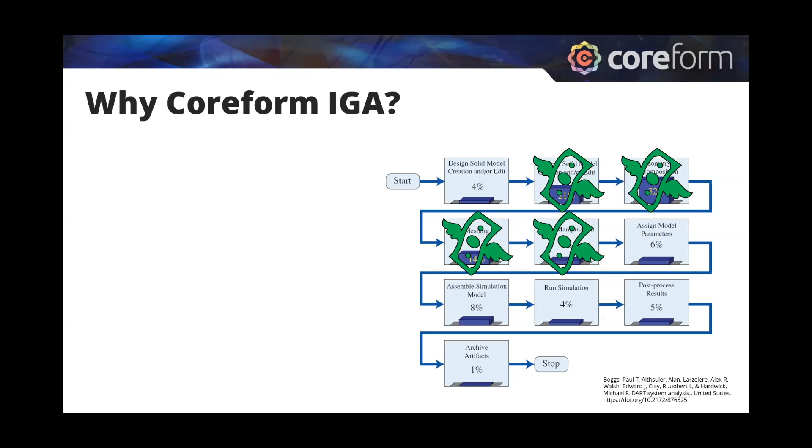Those are all things that weren't value added, and they're extremely labor intensive compared to the compute time on a computer, where the computer works 24/7—except for me, maybe it's got some downtime, but 99.9% uptime. The computer doesn't complain. And so it's all this labor that is actually causing a lot of lag in time and in money, in cost and money.

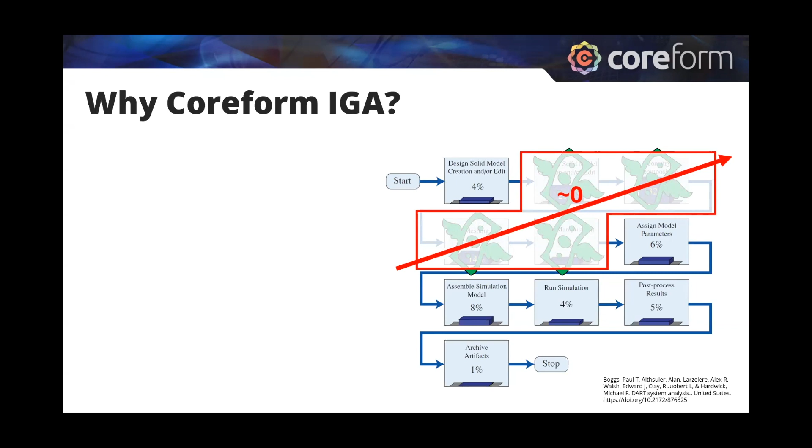The intent, or the desire, is to drive these non-value-added parts as close to zero as possible, and to do that through reducing the meshing time. By doing that, we can radically accelerate product design as well as analysis. So when there's failure analysis, we need to do a simulation to understand why things failed, and we can accelerate that process as well. We can do this through our proprietary advanced spline basis functions, which increase simulation accuracy and provide us the flexibility we need to decrease the meshing time.

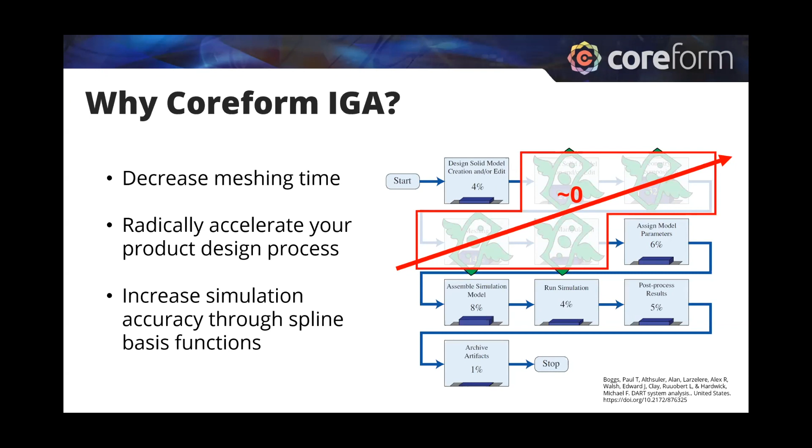Now, if we look at the landscape of mesh technologies and how they relate to simulation performance, we're going to look at the performance of simulation from total time to solution, from slow to fast, but also the accuracy from low to high. Traditional hex-based FEA is slow relative in terms of total time to solution because it's very labor intensive, but provides high accuracy results, which sometimes you have to have for critical, mission critical parts.

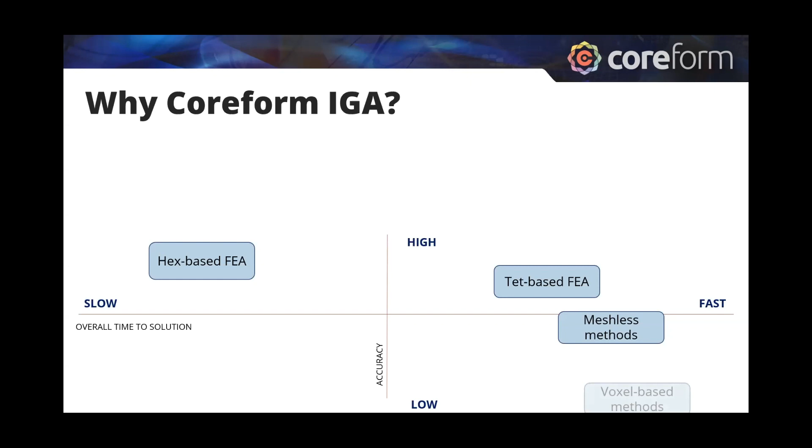and failure analyses. Tet-based FEA provides a much faster overall time to solution than traditional hex-based FEA, but you sacrifice some accuracy per degree of freedom. And there are additional techniques coming out, like traditional meshless methods and voxel-based methods, which provide even faster total times to solution, but sacrifice accuracy even more.

With our advanced spline technologies at Coreform, we've actually now increased the accuracy level that can be attained by modifying or augmenting traditional hex-based FEA with body-fitted U-splines, high-order smooth U-splines. And because of their high order and their smoothness, it reduces some of the constraints on the quality of a hex mesh that we might prescribe, as well as less time iterating for the analyst trying to get the right knobs turned to get accurate solutions. But it's also still not as fast as we could be.

And so what we're now looking at with Coreform IGA is the other regime where we can take immersed U-splines, which now provide still high accuracy because they're high order smooth basis functions, but are now much faster than traditional hex-based FEA. And it's this entire regime that Coreform IGA is developing a software solution and different technology solutions for.

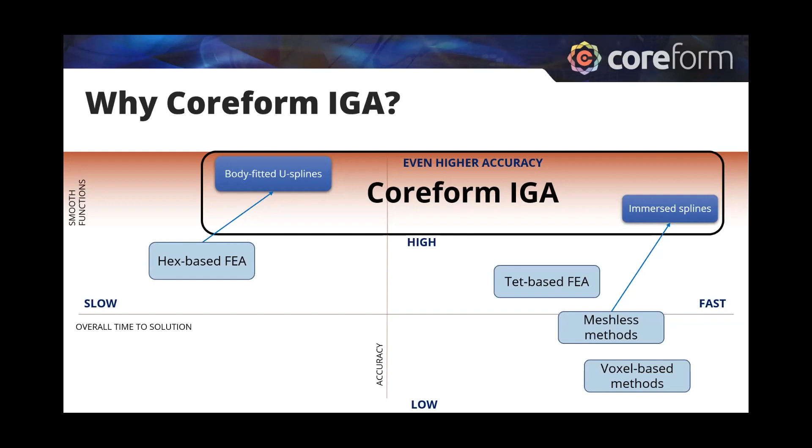Coreform IGA provides greater accuracy per degree of freedom, as I mentioned, but it's also isogeometric analysis. It has a tight CAD connection. Because of the local adaptivity properties of our underlying U-spline bases, you have more efficient computes. And then the flexibility offered by our proprietary technique allows the analyst to calibrate the speed and accuracy they need to solve the problem for their customer.

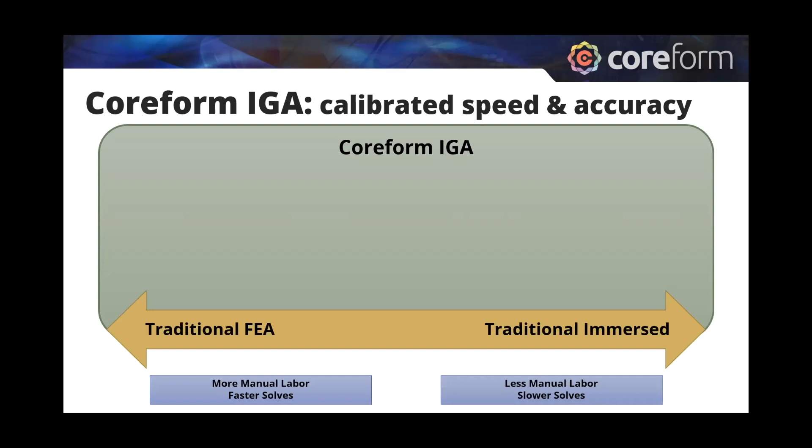Let's talk about how we allow the analyst to calibrate their speed and accuracy. So as I mentioned, we provide now a spectrum from traditional finite element approaches where, if the analyst desired or still needed to do some defeaturing—maybe there are some embossings that just don't make sense to have featured—you might do some defeaturing, but traditional FEA is attainable with our U-spline technology.

But there might have been features in the underlying CAD that made it impossible, or at least impractical, to build a body-fitted hex mesh for. By using a mostly body-fitted mesh, but reducing the requirement of body-fitting in some regions, we can restrict that requirement, which allows us now to build a high-quality hex-based mesh with high accuracy per degree of freedom.

And if you don't need that level of accuracy, but still need some general accuracy, you can defeature quite a bit more. Now our computational domain, shown here in purple, captures the outer radius of this piston and the symmetry faces. But other than that, we're really just going to use our adaptive U-spline technology to drive in accuracy where needed. So we can still get to any level of accuracy the user needs, but it will cost a little bit more in computation time because we'll need to drive more local adaptivity.

And you can go all the way out to almost no manual labor whatsoever—a fully immersing bounding box—relying completely on the local adaptivity of our U-spline technology.

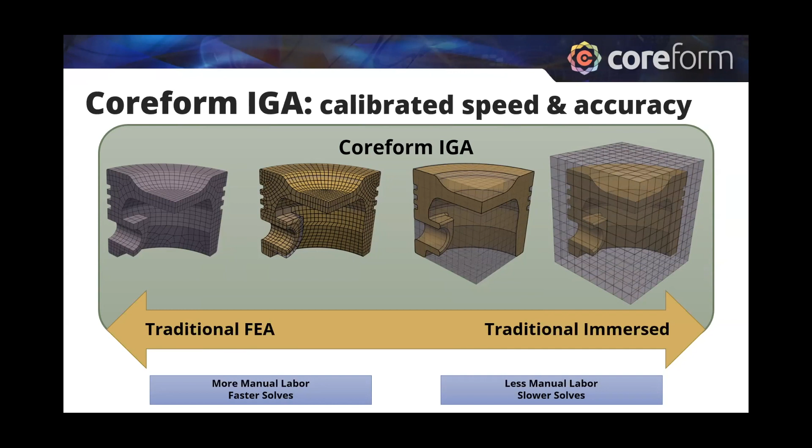Now, I want to show you this in action on an example problem.

Actually, before we do that, let me just focus in on that second from the left picture here. Here's this geometry—if you wanted to do a traditional hex-based mesh on this, there are these knuckle fillets, or shoulder fillets, which make this problem almost impossible to build a hex mesh for. It's possibly impossible for an analyst, in a reasonable amount of time, to build a usable hex mesh on this.

But you can see how we've now restricted this requirement, or lowered or removed it, with this purple computational domain, which immerses these features but still follows the general shape and structure of that volume. Now we can use our U-spline technology to locally adapt and refine where needed to accurately resolve the stresses there. So as an analyst, I've calibrated that I need to get a solution out to the customer quickly, but I still need a fair amount of accuracy. And this has allowed the user to drive that in.

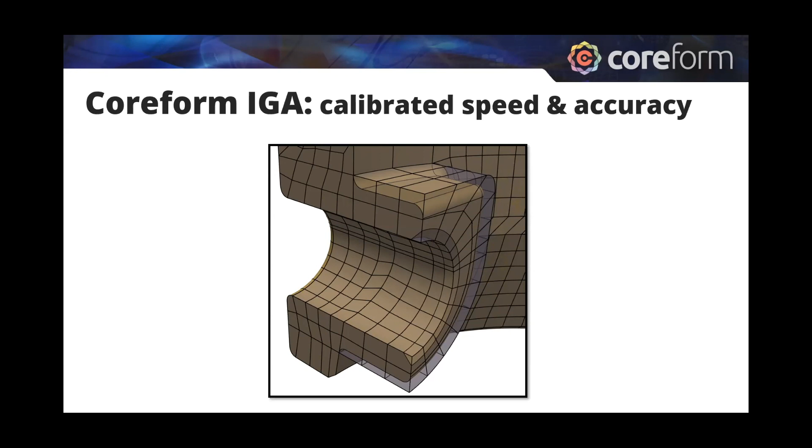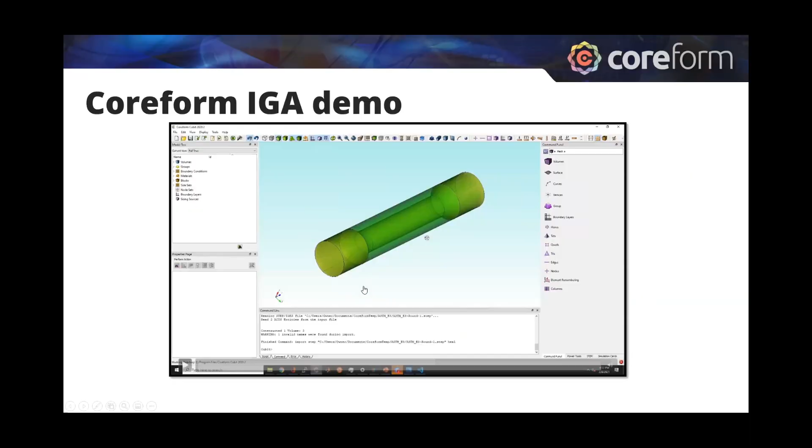Now I want to show this in action. So I'm going to show this example of an ASTM E8 tensile bar, and we can load this into Cubit as a geometry.

Cubit is a traditional finite element mesh preprocessor that supports CAD operations and meshing. We can represent this tensile bar as a cylinder that is only body fitted on the grip lengths, and then immerses the fillets, reduced length, and the gauge length.

Using Cubit, we can design our hex mesh as we need to on that cylinder for quality, and we can build a U-spline native into Cubit. That's never been done before, having Cubit natively now supporting spline technologies.

We can then create an input file and submit the simulation to our Coreform IGA solver, and then view the results back out in ParaView.

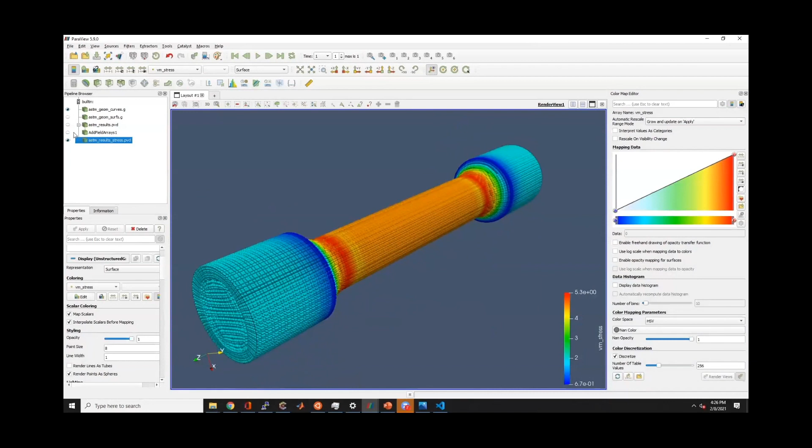On this slide, we're seeing the U-spline elements that contain at least one quadrature point within the volume. Now we can see we're looking at quadrature points of the stress results and also displacement results. This is brand new capability that we've added in the last few months.

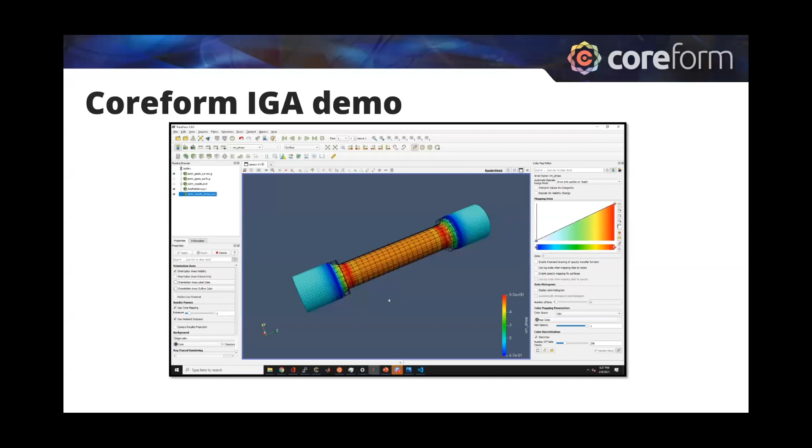And this is progressing at a quick pace. We'll talk about that later, that Coreform is releasing software now quarterly, and actually moving to an even faster release pace as we're developing capabilities.

Let's take a closer look now at that. So again, just that we have this tensile bar, if I wanted to build a quality hex mesh on this, I might need to do at least 2 partitions, maybe for my gauge length. I might also need to add another one around the other side of the fillet.

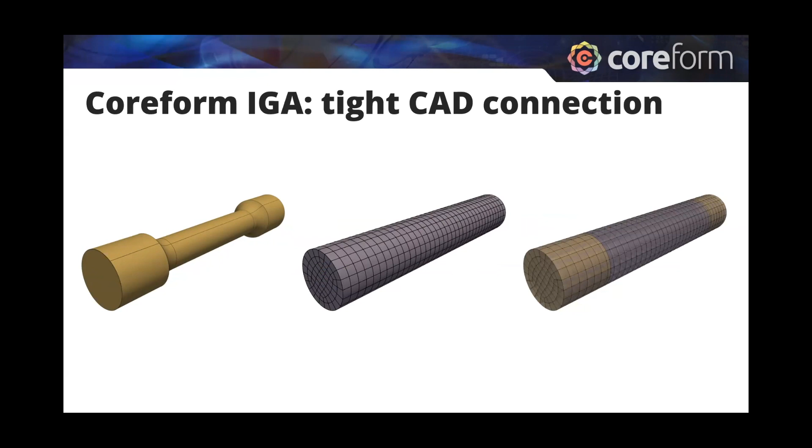But instead, we can just completely approximate this entire tensile bar as a quadratic U-spline cylinder that immerses it. So it's a tight CAD connection, but we also aren't sacrificing accuracy.

Comparing accuracy per degree of freedom, we can see that with 15 times fewer nodes and 30 times fewer degrees of freedom, we can get stress results that are within 0.1% of leading traditional FEA solvers. And that's just astounding.

Next, actually here, I'd like to pause for a bit and see if there are any questions, because this is maybe a new way of thinking about simulation technology. So I'm sure that there are some questions. So Matt, do we have any?

Yeah, so there are a few questions. One is about the solve time for how long this is taking in Coreform IGA, and if that's optimized yet. Sure.

Okay, sure. So one of the things I'll say, and we'll talk about this later, is that we use the PETSc open source solver library. PETSc is fully parallel, provides direct solvers, iterative solvers, Krylov solvers. We have the full power that's in there. If you look at just from degrees of freedom, because we have smaller systems of equations, those should solve faster. We have smaller systems to solve.

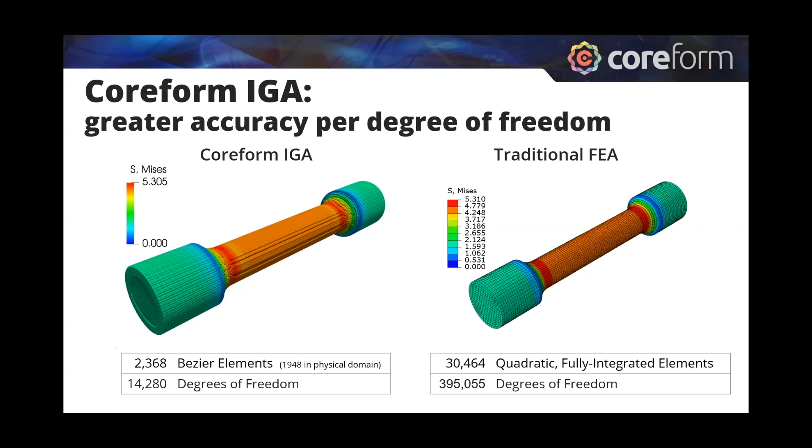Good, great. And so as I alluded to, we've done several projects, actually many projects with our early adopters. I'd like to go through at least a couple of those right now. So the first of these was provided to us from our partner, our collaborator, Kansas City National Security Campus from the Department of Energy. They have an application with flat flex cable delamination.

Just to orient you, flat flex cables connect printed circuit boards together. Oftentimes you might have a bunch of electronics you need to be able to perform a task, but you're constrained by space. And so you split your board into two boards, and then you use a flat flex cable to connect them. As you can see here, this cable is now bent at a certain radius.

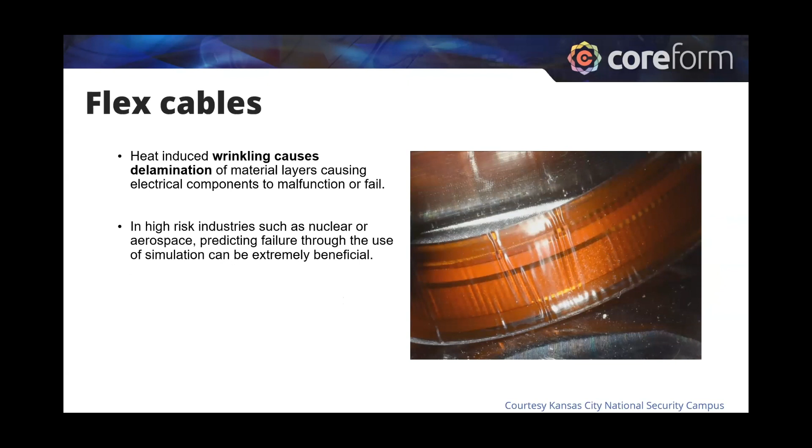The question Kansas City had was that they were noticing, as they were bending cables to certain radii, that during environmental testing these cables would start to wrinkle and then delaminate, which could potentially lead to failure of these cables. So Kansas City had developed simulation technologies or simulation workflows to analyze these with traditional FEM style codes.

On the right here, we see a mesh from a traditional FEM solver using many of the rules of thumb that many of you may be familiar with, like making sure you have a minimum number of elements through a thickness. In this case, the top is going to be in compression, that's where the wrinkling's happening, so there's a finer density of elements at the top.

The problem that Kansas City developed with our high order U-splines is shown on the left. A couple things to point out: because of the higher order, we can exactly capture this geometry with one element. We can also terminate our elements with T-junctions that are fully supported in the basis, so they're not hanging, there's no need to do a tied constraint between them. They're fully supported by the U-spline basis.

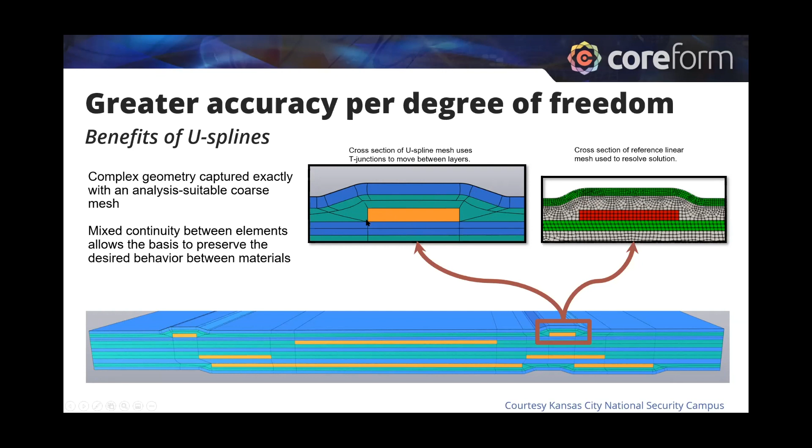We're also able to implement mixed continuity, so to have traditional C0 continuity at material interfaces. On the right is an animation showing this nonlinear analysis running in Coreform IGA, colored here by stresses. As we notice at the very end of it, we start to see wrinkling.

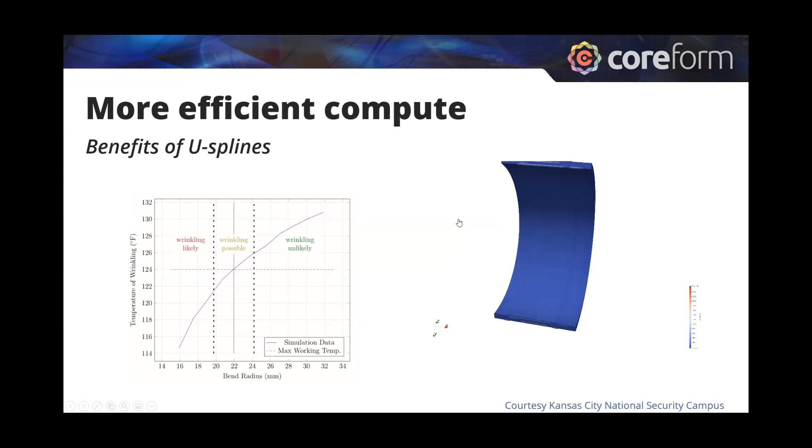We were able to give this capability back to Kansas City for them to be able to use to predict wrinkling, and compare it again back to their traditional solutions, where they were using upwards of 10 million elements to get solutions. We were able to solve this with under 11,000 elements - 1,000 times fewer total elements.

As Dr. Scott had alluded to previously, by drastically reducing the number of elements we have, even if each element is a little bit more expensive than traditional FEA, the almost exponential increase in accuracy per degree of freedom or per element is what allows us to be more performant.

Additionally, they were unable to get stable solutions using an implicit time stepping method, so they had to resort to a mass-scaled explicit statics study. We were able to solve this with default implicit dynamics solver settings. We didn't bother to use anything like automatic time scaling, we just used a set 250 time steps, but even that is 20,000 times fewer total time steps.

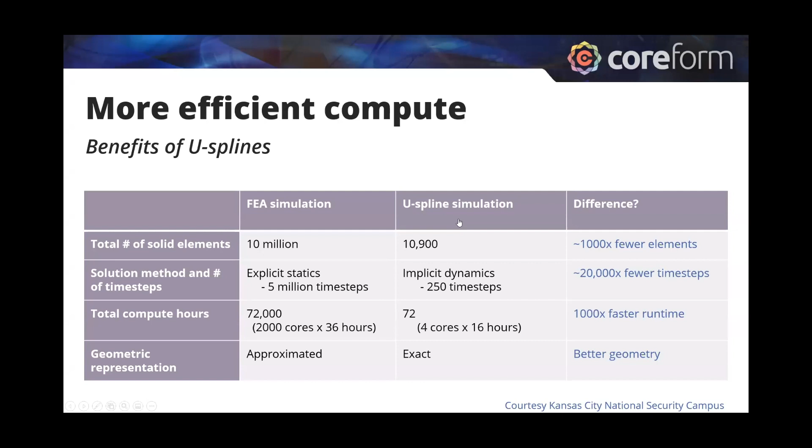In all, this led to almost 1,000 times faster runtime by reducing their computational needs from an entire high-performance computer for about a day and a half, down to a laptop in 16 hours. And that's drastic - that makes this problem tractable for Kansas City.

Next, I'd like to talk about an application of high importance to Idaho National Laboratories: a nuclear fuel rod. A nuclear fuel rod is comprised of uranium oxide pellets, often 300 or more pellets long, surrounded by a zircaloy cladding. As they produce energy, they increase in temperature and expand, as we see in the top right figure, and begin to press against the zircaloy cladding. So this is a tough contact problem.

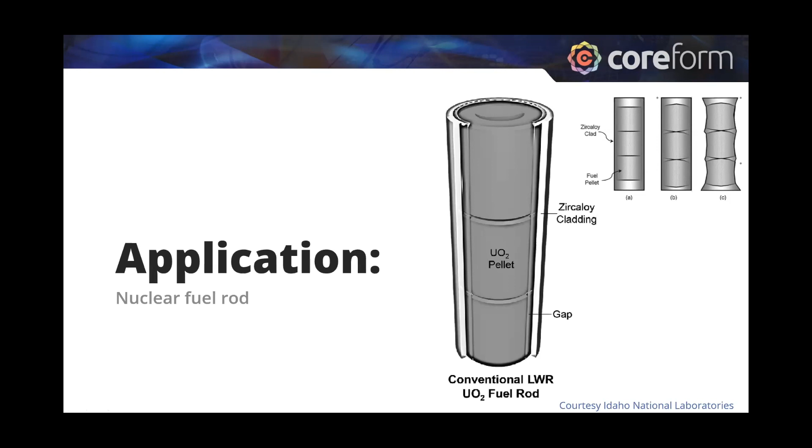Traditional finite elements would use many low-order finite elements, and now instead of solving like a cylinder or a circle, we're actually solving like a 30-sided polygon or polyhedron. It's important here from a pre-processing stage to make sure your nodes are somewhat lined up between the cladding and the underlying fuel pellet.

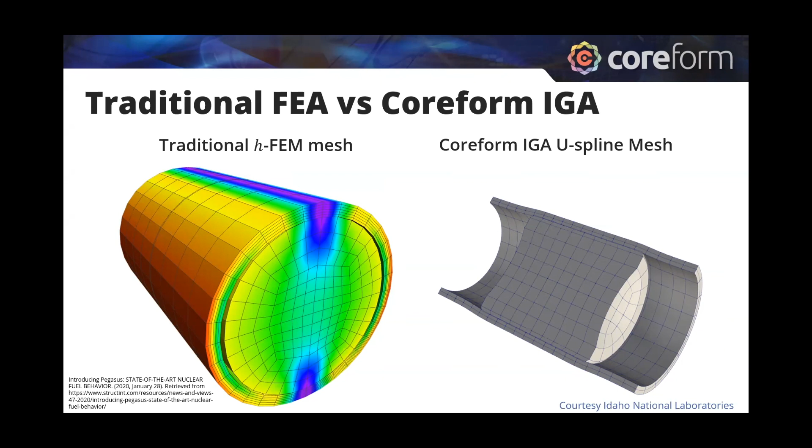To make sure you don't get poor convergence in contact, on the right we can see the U-spline solution that Coreform developed. High-order smooth splines allow us to have fewer overall elements while also exactly capturing the initial geometry of this cladding with smooth contact. Compared to the initial solution from INL's open source Moose finite element library, the contact pressures should be smooth along the radius as well as along the length.

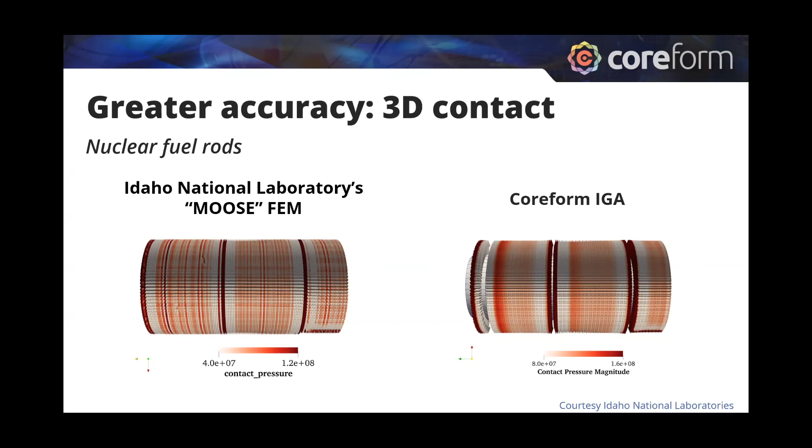There should be smooth transitions in contact, but instead we get these spurious, checkerboarded patterns. That's representative of the difficulty we see as FEA analysts in getting contact problems to converge, having to make sure we got the right solver settings for convergence. With Coreform IGA, however, we have smooth contact pressures both along the radius and along the length. What this meant for Coreform as we were solving this is that the problem just solved -- there wasn't a lot of tweaking we had to do to get convergence. Contact, for those not as familiar with solid mechanics finite element analyses, is one of the most difficult nonlinearities to solve in these workflows.

The next example -- those previous examples showed body-fitted, taking traditional hex-based FEM and augmenting them with high-order smooth splines. Our immersed technologies are relatively new compared to the years of experience we have with traditional hex-based FEA. We aren't able to share any of our partners' problems at this time, so instead I'm going to show a demonstration of a complex, partially body-fitted, partially immersed model, just to show and demonstrate the capabilities we're providing with Coreform IGA. Since we don't have domain expertise in automotive tire design, this is not reflective of the actual real life application, but rather a demonstration of the capabilities.

Here's a figure of the model we want to analyze: a wheel assembly with a tire and a rim. As we can see, there's a gap between the rim and the tire, and the treads are cut into this outer range.

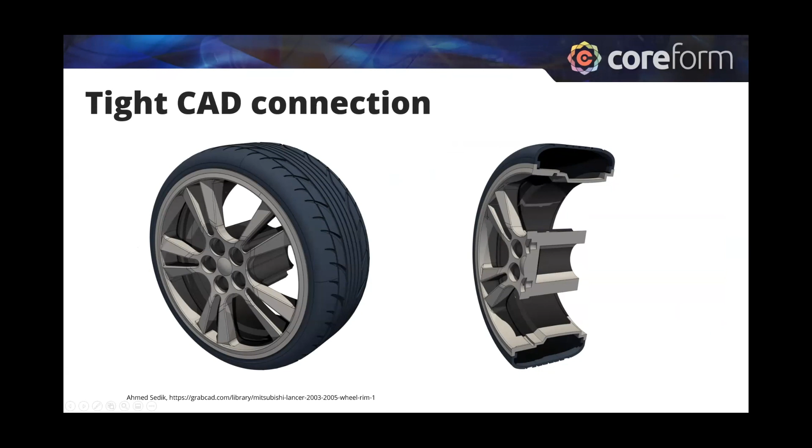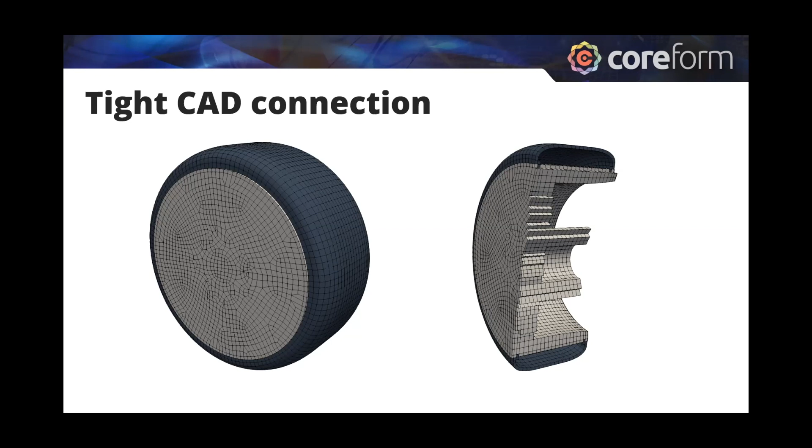On this next slide is the Coreform IGA mesh we've built that immerses that geometry, but partially body fits in regions. If we really cared about, say, our tire -- for contact pressures and friction, or tracking traction on a road -- we are body fitted here. This is where the tight CAD connection comes in: if you were to change the tread design, as long as it stayed within this envelope of this blue region, you wouldn't have to remesh to analyze a new tire tread design. This one mesh can be reused over and over without updating.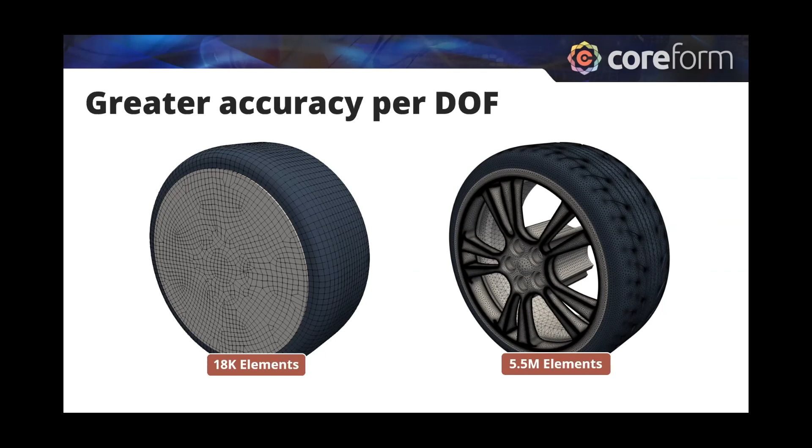If we look at the cross-section view, we can use local adaptivity as needed to refine stresses. But even this 5.5 million element mesh is not refined enough to accurately capture stresses in some regions. For both cases, these are a bit of an underestimate of the amount of elements, but with our high order U-splines and greater accuracy per degree of freedom, you'll have fewer elements and fewer degrees of freedom with our Coreform IGA solver.

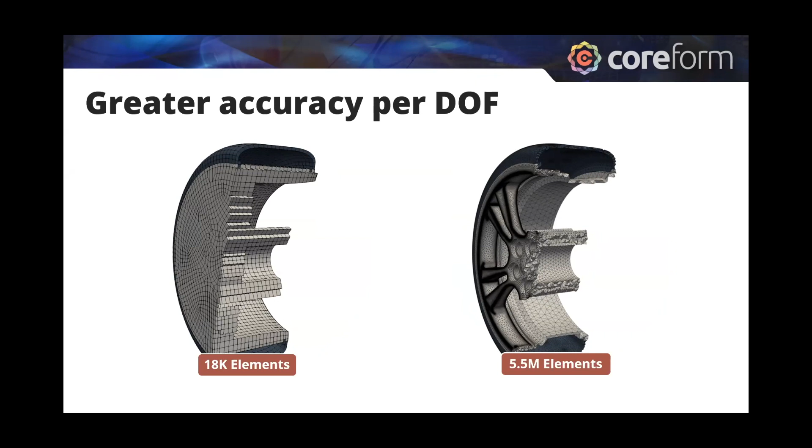Next, I'd like to introduce our software products. Two software products that Coreform is currently distributing are Coreform Cubit and Coreform IGA.

Coreform Cubit is our advanced meshing simulation tool and model preprocessor. Many of you might be familiar with Sandia Cubit, or there had been a commercial version called CSIMsoft Trellis. Trellis has now been rebranded as Coreform Cubit, and it ties into the decades of development at Sandia National Labs. We co-developed the Cubit software with Sandia, and we're grateful for their support.

Cubit is an unrivaled hex mesher with state-of-the-art structured and unstructured hex meshing capabilities. But it also provides tet meshing, as well as from hexahedral through pyramid to tet. So hex to tet meshing is also provided in Coreform Cubit.

But Coreform Cubit is more than just building a mesh. It also provides the user expert level control of their mesh, so you can design the mesh as you need to solve your critical problems. We also have standard geometry cleanup tools provided from the ACIS geometry kernel that underlies it. All those things combined give you a comprehensive tool set for everything you need to prepare your models: pre-processing, meshing, and exporting.

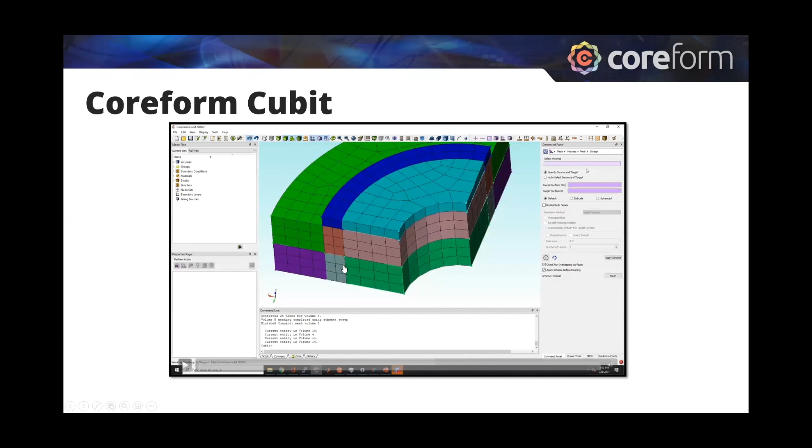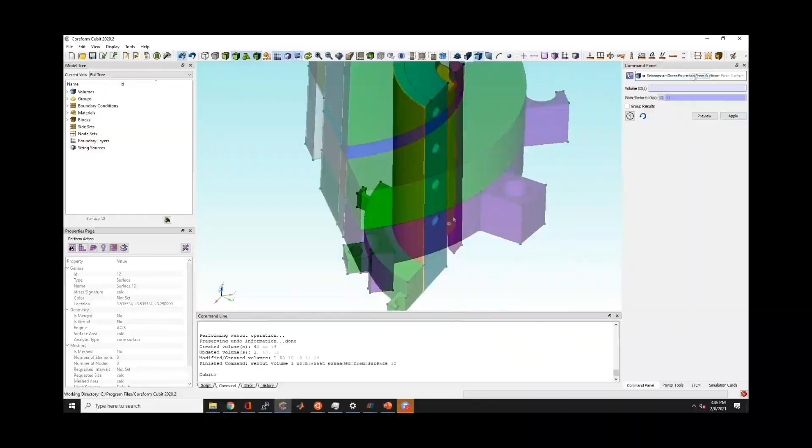Here's a video showing Coreform Cubit in action producing a U-spline mesh, but also demonstrating that all of the traditional workflow functions you would expect in a hex or finite element mesher are provided. So everything from defeaturing of small features to model decomposition is provided. There's imprinting and merging, so if you need a conforming mesh, you can imprint and merge. However, with Coreform IGA, it's not even necessary to have conforming meshes.

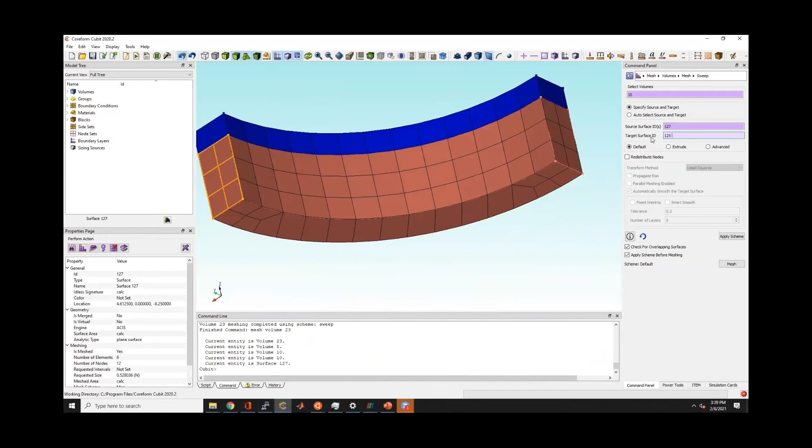As I also mentioned, Coreform Cubit provides the user precise control over their mesh, so you can design your mesh exactly as you want. In this case, maybe we're trying to remove extraordinary points from our eventual U-spline domain. This is the kind of control you won't find in a lot of other meshing software, but you'll find in Coreform Cubit.

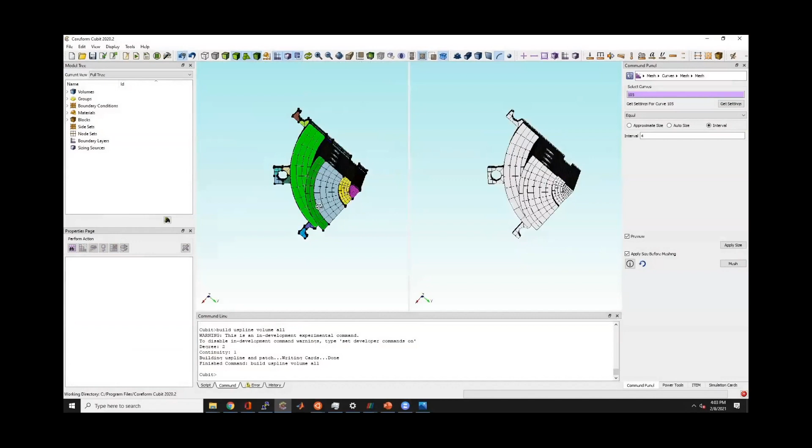Lastly, as I alluded to, once you have a mesh, we can produce a native U-spline in Coreform Cubit. And it's not just in Coreform Cubit, but we also support exporting U-splines out to, say, the visualization toolkit and ParaView and other simulation codes. Many of our simulation partners are implementing U-spline technologies in their solvers as well.

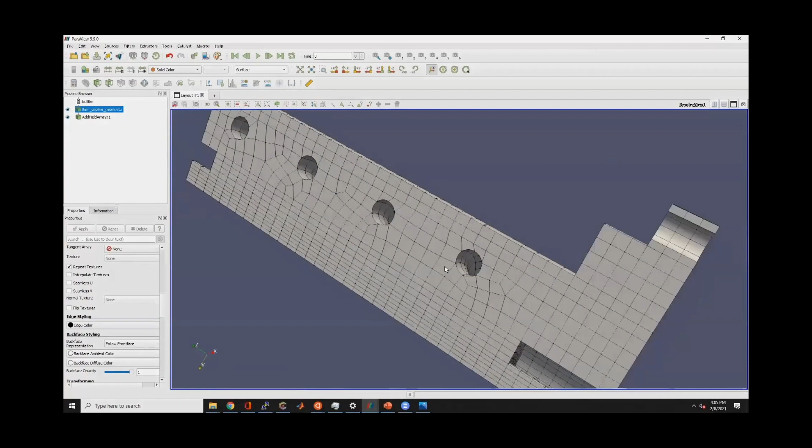We're also excited to announce that there's a free version of Coreform Cubit called Coreform Cubit Learn. It's available for non-commercial use, and you have access to all of the training materials on our website. It's fully featured with a limitation of exporting up to 50,000 elements, which should be more than enough, especially with high-order U-splines to solve relatively complex problems. You can get your free license by going to our website at www.coreform.com.

Next, I'd like to introduce Coreform IGA, especially its feature set, so the things that you care about as an FEA analyst. As I've mentioned before, it is a native implementation of isogeometric analysis, or IGA.

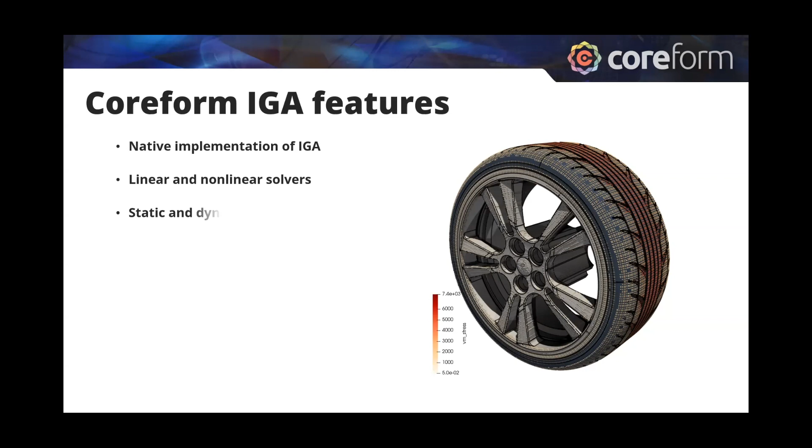We provide both linear and nonlinear solvers, again, through the PETSc library. We can solve static and dynamic physics. We can use implicit and explicit time integration schemes. We support nonlinear materials, geometry, contact, and more.

If you're interested in implementing your own user materials or subroutines, we use Julia as our user subroutine interface and user material interface. That's a high order language that doesn't require you to worry about pointers and other things, and it can still achieve nearly the same performance as many lower level languages like C++ and Fortran. Finally, our input files are human readable, currently encoded in the ASCII JSON format.

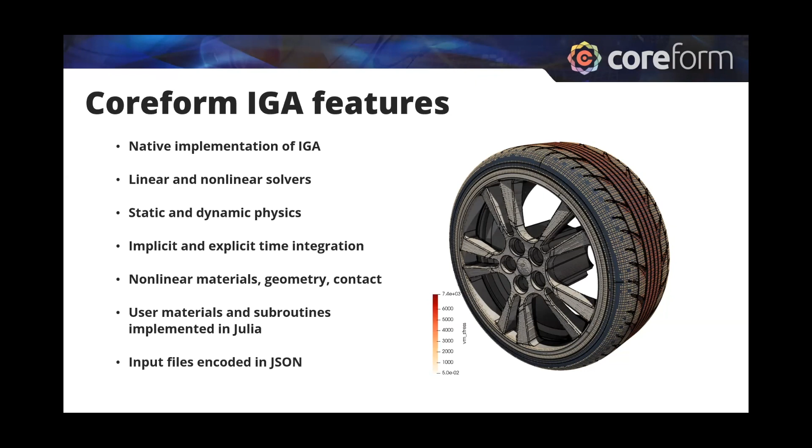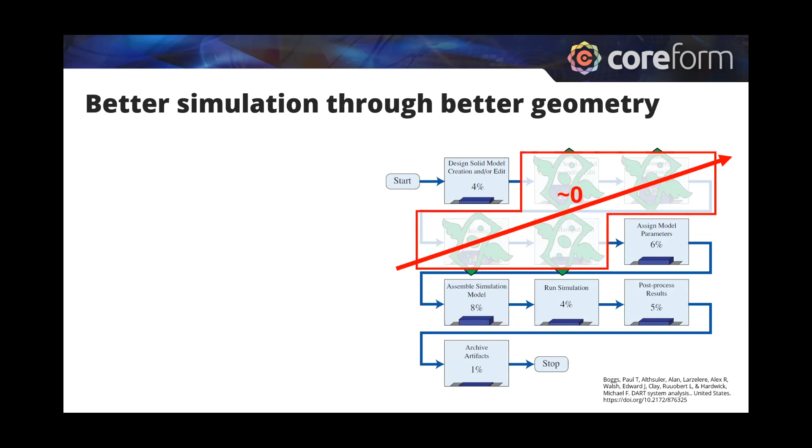And just to reiterate, Coreform IGA can help you save money by giving you better simulations through better geometry, allowing you to decrease the burden of model preparation, speed up your solutions, and reduce the difficulty of producing convergent solutions.